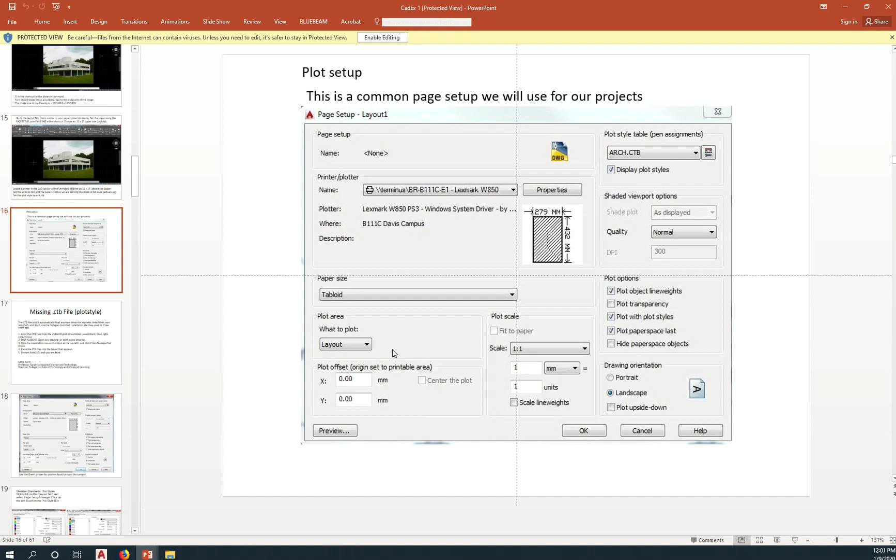Okay, next thing I need to do is set up our paper. So right now, we are working in our model space. This is what we call model space. If you check here, the bottom left corner, you see that's the model tab.

Now we're shifting or moving to the layout tab. Kindly click on the layout tab. Kindly write that down. Click on the layout tab. I'm going to work on layout 2, since I've already worked on layout 1 earlier. So layout 2, you can work on layout 1.

I'll just be working on layout 2. So go to the layout tab. Next, right click on the layout tab and select page setup manager. Okay, select page setup manager.

So we're going to select or set up the page. Now the page is your paper. Similar to Studio, you bring an 11 by 17 or a big paper, that's the sheet you are working on right now. So this is the same. We're going to set up the size of the paper. We're going to use 11 by 17, or tabloid.

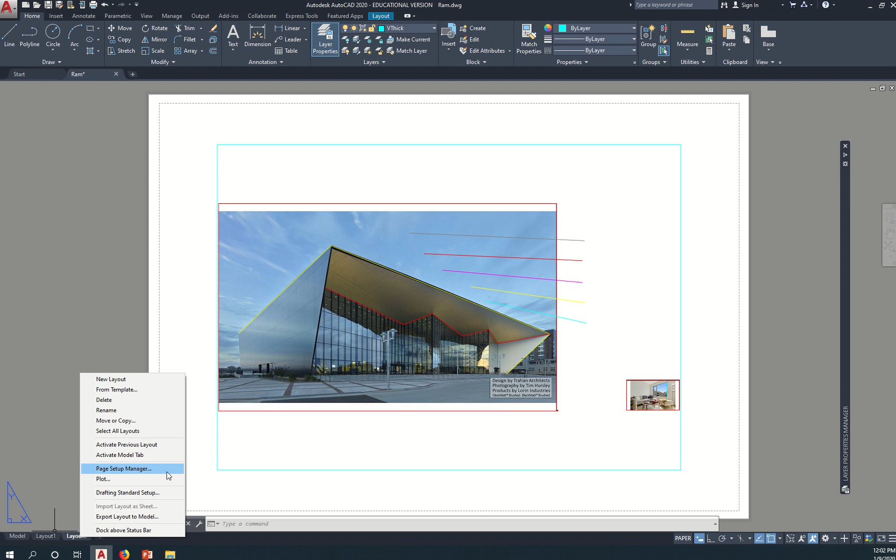So page setup manager, layout 2, I'm going to modify this. Click on modify. And then the first thing you want to do is select the printer.

That is why, in your laptop, you might not be able to set up a tabloid, because you are not yet connected to the V drive or O drive. You haven't mapped it yet, so you're not able to install the printers here. The printers here can print an 11 by 17. I think at home, you might not have a printer, or your printer only prints an 8.5 by 11 or a legal size paper. So, very important: for your laptop, you might need to install the O drive or map the O drive and V drive, and then install the printers.

Another workaround for that is to work on your laptop, and then for printing, email it back to your desktop CAD lab computer and then print from here. Okay, so that's a workaround.

So the room here is 494, so you can select B494 for your printer. If you're in a different room, you might need to print there. Make sure you have the right room so that you don't print elsewhere, right? You know where you're printing. So if I want to print here, I'll just select that printer, B494. Very important first step.

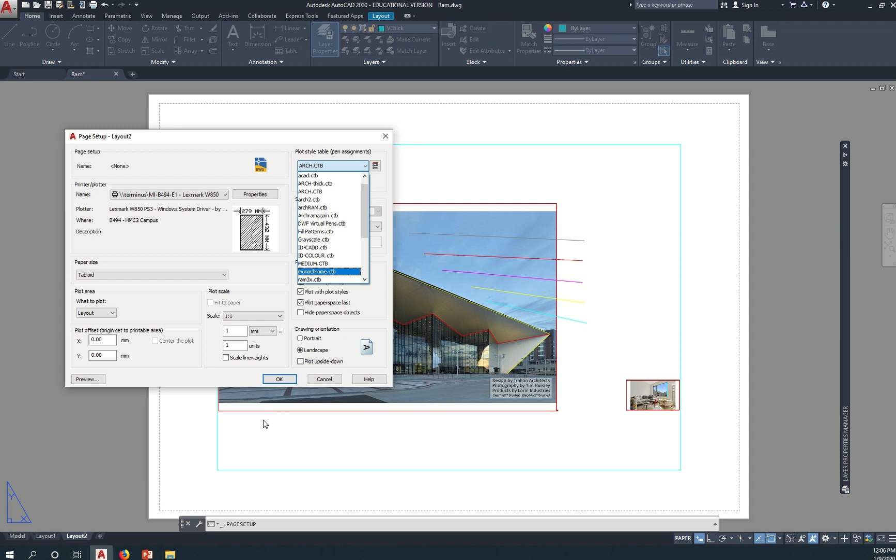In your laptop, you might not have the ArchCTB, but you can create a new one. So you can create a new one, and then you can set up your ArchCTB so that, right?

If you're missing an ArchCTB, I can give you a copy and you can do this, or make all those settings. For the ArchCTB, the line weight is, or has, a thickness.

So color red, that's why I said for the thin one, use color red, because it will print at 0.13. Yellow, I said that's a thick one because it will print at 0.5. And then I said magenta for medium because that will print at 0.25. And then I said very thick will be cyan because it will print at 0.7. And very thin will be color 8 because it will print at 0.05.

Now, where do you see that? Right here, you can edit. Right? Clicking on this button, you can edit this. And you can see that color 1 will print as black and it has a line weight of 0.13.

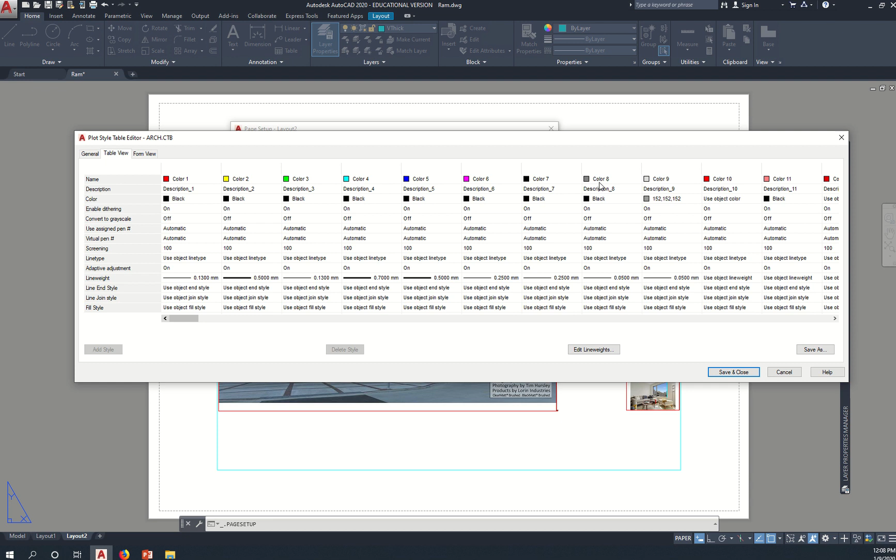You can view this as a table to see the different colors and how they'll print, so this will print in black, and what's the line weight. So red, yellow—that's why I ask you to select the index color, not any other color, because the other colors will have no line weight assigned to them.

They don't have any line weight assigned to them—only these colors from 1, or red, to color 8. This is the ArchCTB, so save and close that. Make sure you have these settings for your page setup.

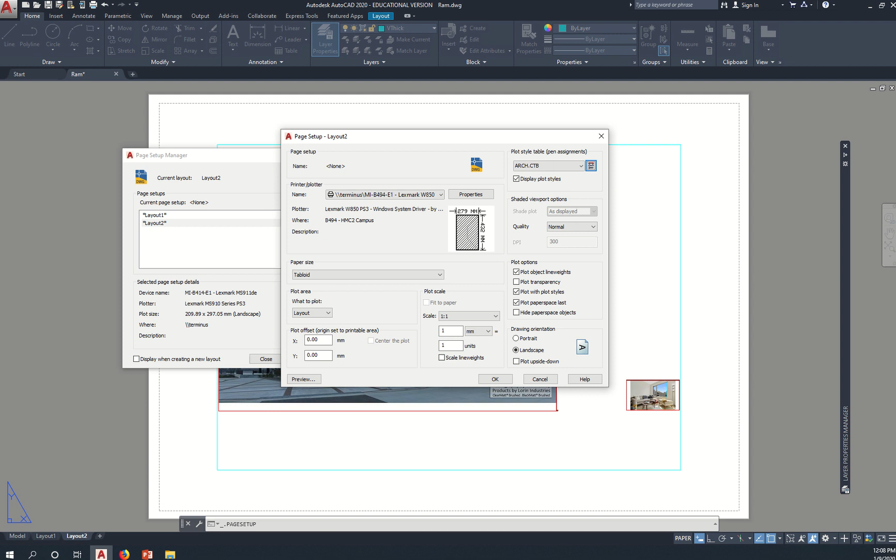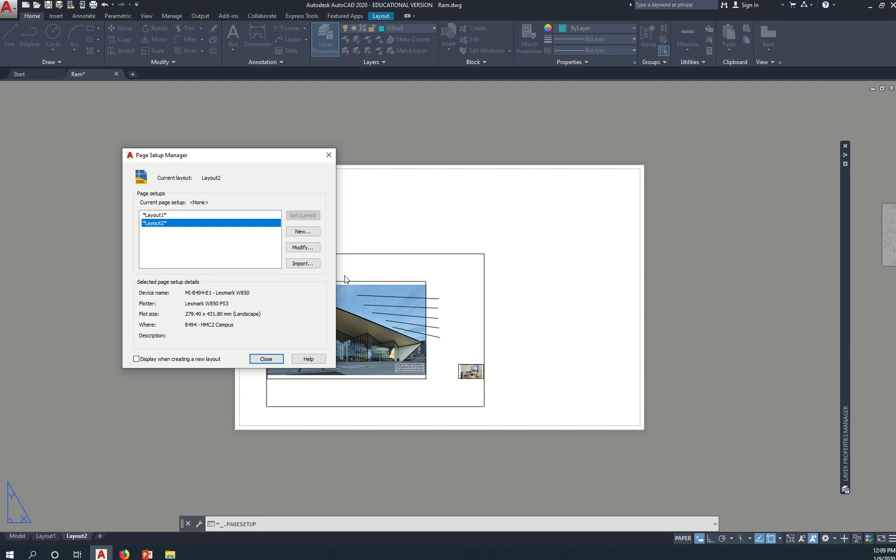Kindly take a photo of this. So I'm going to click OK to this and close. Notice that I now have my paper. This paper, the white area, is 11 by 17. Actually, this is 432 by—what's that again? In millimeters it's 432 by 279. Okay, so let's learn what this means.

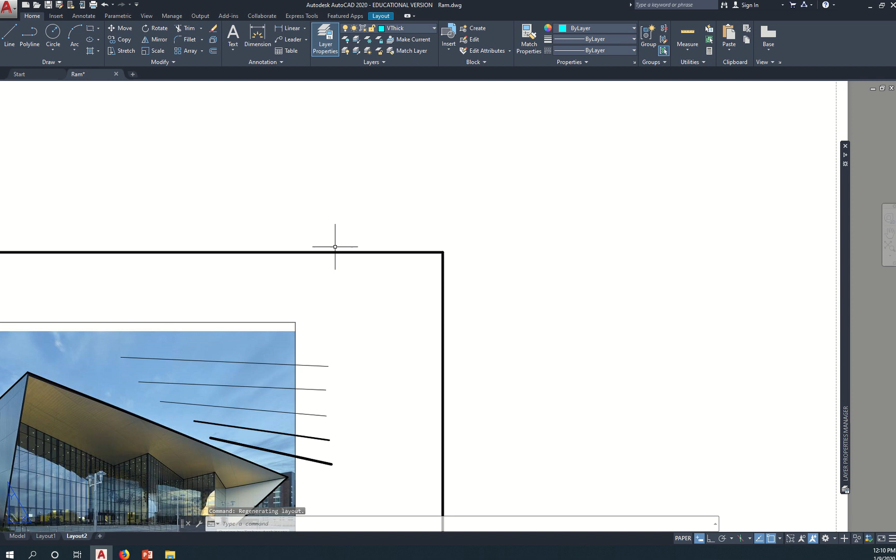The white area is the paper size—that's the edge of the paper. The dashed line is the printable area, so you can only print up to where you have that, before the dashed line. Beyond the dashed line, items and lines there will not print. Now, this box here is very important.

That's what we call a viewport. If you delete that, what happens is that the image wasn't deleted, the viewport is what got deleted. To bring back that box, you type MV, Make View, and press Enter.

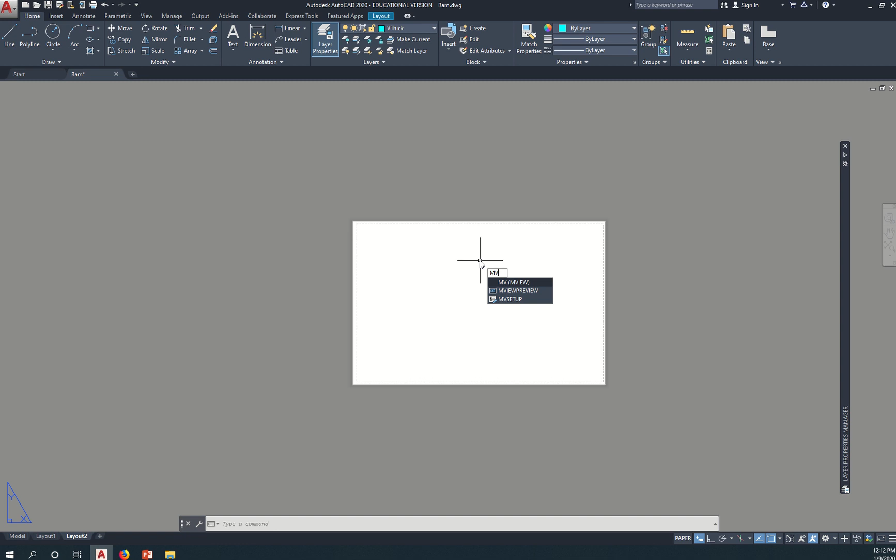If you want that box to print, you can place it inside the dashed line. If you don't want it printed, place it outside or beyond the dashed line. So I'll just place it beyond the dashed line, and there's your drawing again. What did I do? I cut out the paper—that's what I did.

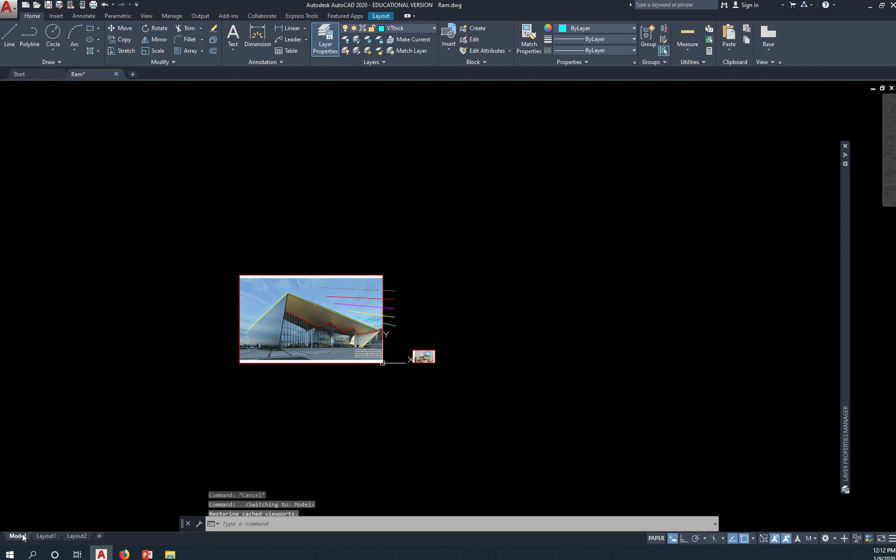That's why now I'm able to see inside model space. Paper space is the paper—you remove a portion of it, and you're able to see model space. So that is a window to model space. That's why we draw in model space and we lay out in paper space.

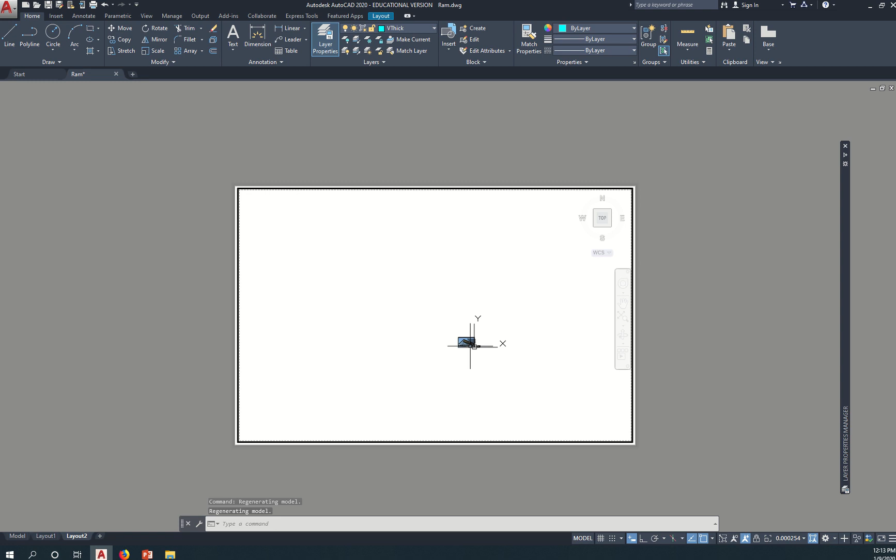Now, if I double click inside the box, I'm actually zooming in and out of model space. That's what I was saying—you're getting closer or farther away from the drawing, but the size of that image is not changing. You're just zooming in and out. This is what we call magnification.

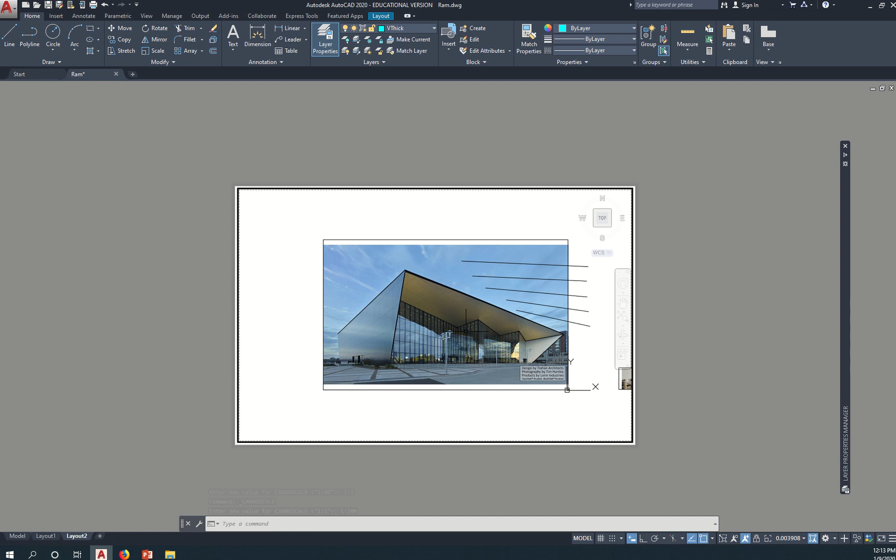And for a studio, you're actually saying scale 1 to 100, or scale 1 to 40, or scale 1 to 1, which would be really big, right? So let's say scale 1 to 100 for now, or I'll just zoom out for now and fit it in my paper.

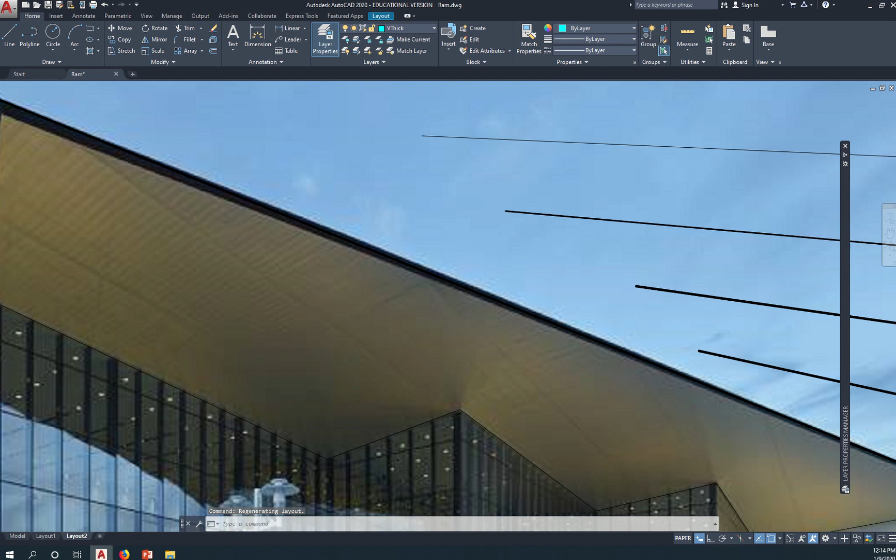Okay, so zoom so that it fits my paper. If I double click outside, that brings me to paper space. So how do I know I'm in paper space? If I zoom in and out, I'm zooming the paper, not inside model space. So to zoom in model space, I need to double click inside the box and zoom in and out there.

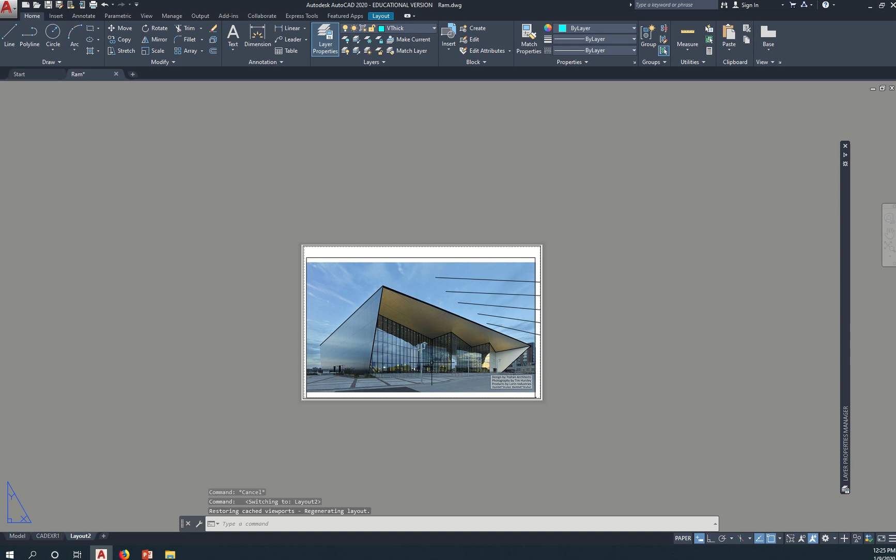So we're going to kindly do that for the two layouts, layout 1 and layout 2. For layout 1, if you double click on it, kindly change that to CAD Exer 1—this is where we're going to print CAD exercise 1, enter. And layout 2 is where we're going to print our exercise 2. So I'm going to zoom in on exercise 2 and name this CAD Exer 2.

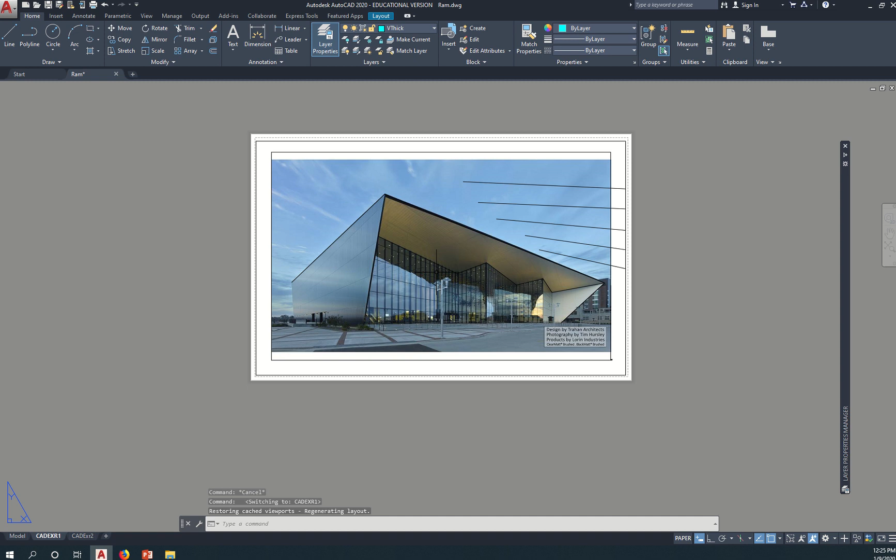So you need to do it for 1 and 2. When we print this, this will be our CAD exercise 1, and this will be our CAD exercise 2. So you need to do it twice: set up 2 pages, zoom in for layout exercise 1, and then zoom in for CAD exercise 2.